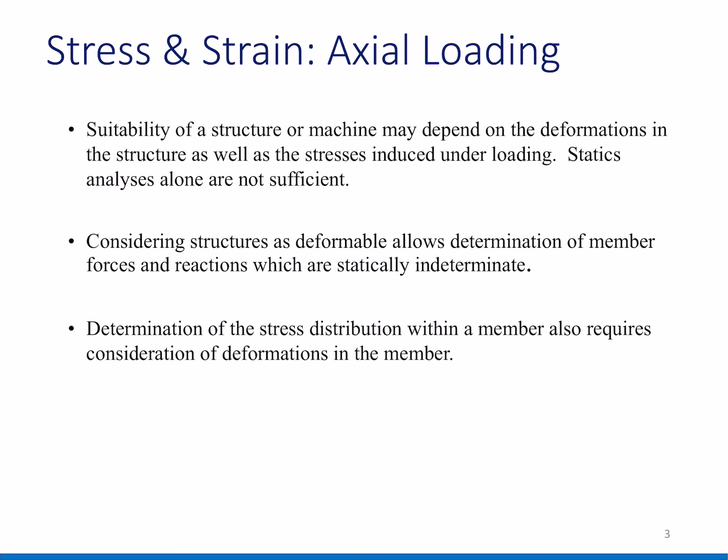So you will see that in each stress distribution formula or problem, we will see that each member of the structure also deforms.

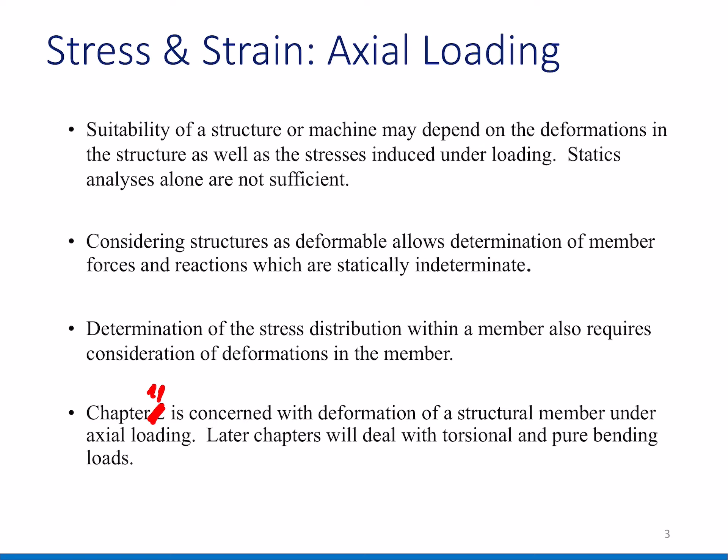This chapter, chapter 11, is concerned with the deformation of the structure member under axial loading. Later chapters will deal with torsion and pure bending. In this case we will talk only about axial loadings.

Normal strain. So this one we will explain about the strain, what is it.

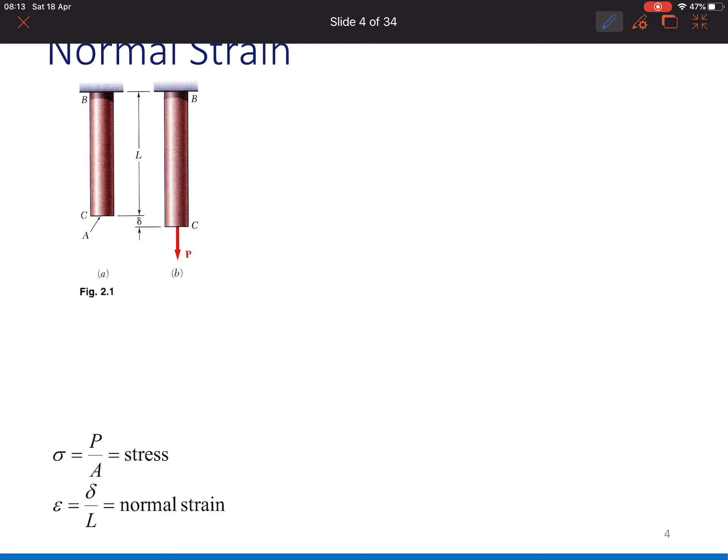If we have this rod which is fixed on this ground, this is picture A, this is the original. This one is a deformable object, meaning when we put force P, we will have these deformations.

If it's SI units, it will be in meters. In the original state, it has a length L. But then in picture B, the length is not L anymore because of course we have lengthened it, so we have L plus the deformation.

The formula below shows the stress and the strain. This is what we call strain, epsilon, and then we have the deformation here. The strain is the deformation divided by the original length, so the strain itself is really the ratio of the deformation to the original length.

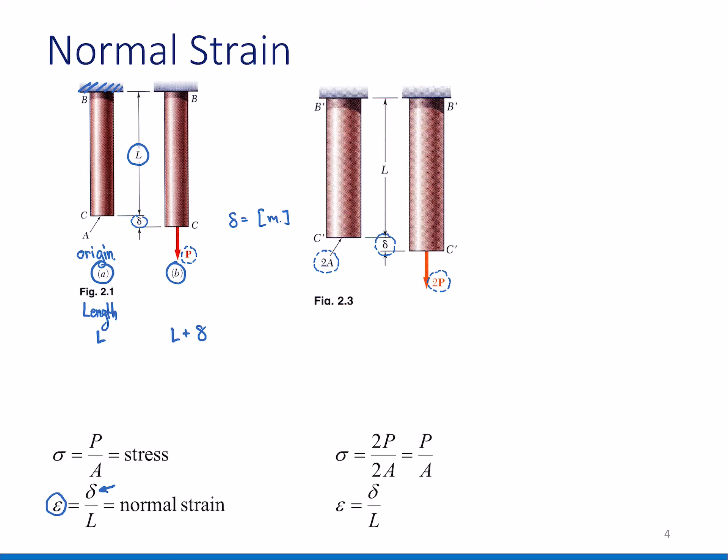So what happens if we have double the area and double the force P? We will still get the same deformation.

What if we have double length 2L, but the same area here, and the same force P? We will have double deformation.

So this means the deformation of the object also depends on the length of the object. If everything else is the same, force the same, area the same, but we have double the length, we will have double the deformation. But as you can see, the strain is still the same, because the strain is just the ratio between the deformation and the original length.

So, what is the deformation then? When you apply the force P here, as I explained in the last chapter, if you cut anywhere on the object, you still see force P applied on it. So every point you cut the object, you have force P.

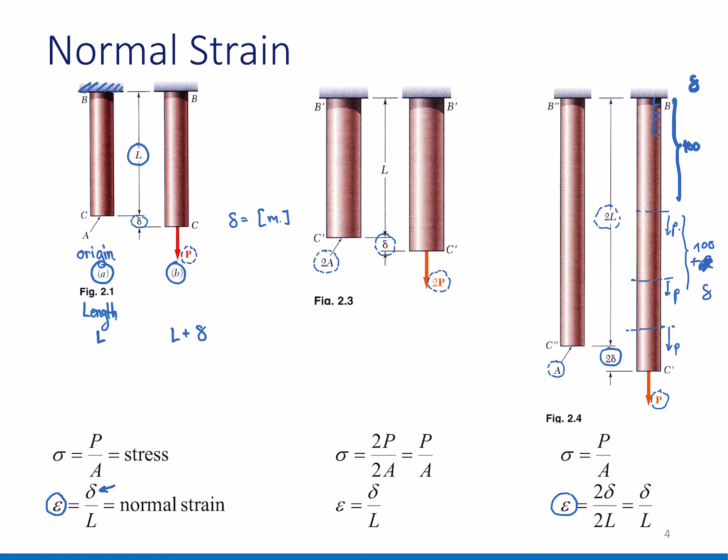Then what does it mean? When I cut this kind of rod into small pieces, and these pieces, for example, if the length L has 100 pieces, each piece is deforming by this deformation length. And if I double the length, I have another 100 pieces here, and then I also have additional deformation to this object. That is why when we have double the length, we always have double the deformation.

Okay, so next is the stress strain test. As I mentioned before, last time we learned about the strength of the material. This time I will tell you where the strength comes from. Actually, it's coming from this kind of test. Of course, there are a variety of tests, but this is the standardized one.

So we have a material here as a rod, and then we fix those two ends. For example, I have a kind of steel, and this is what we call steel. And then someone asks me, hey, can you analyze the stress strain curve or the material strength of this steel?

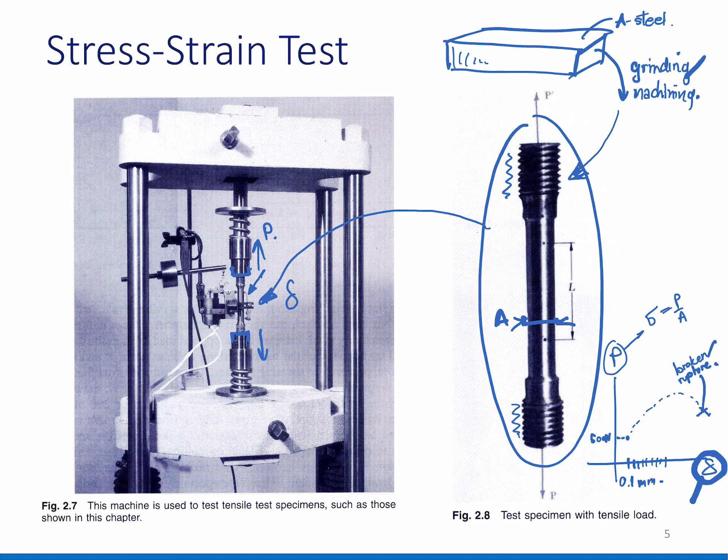What about these deformations? How do we change it? Normally we will not read it as deformation in millimeters, but we will use strain. What is the formula for strain? It's deformation divided by L, right? So we just divide it by the length L here, and then we get the strain.

But actually it's a little bit more complicated, because we also have this length, we have 1, 2, and 3. The formula is a little bit more complicated for the strain, but out of this we can create the stress strain curve.

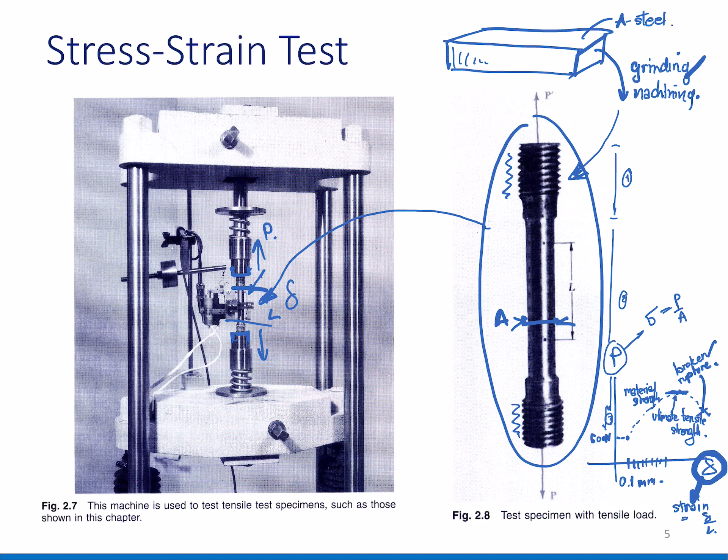And then you know, at this max point here, where the force is highest, we call this the material strength, or we call it the ultimate tensile strength, at this point.

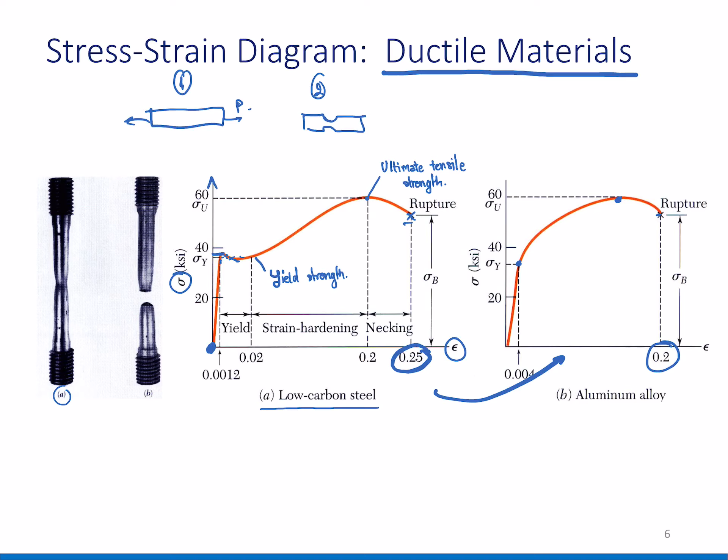Okay, and then we have brittle materials. You can see how sharp this breaking is, quite sharp comparing to the previous picture, right? You can see the previous picture has some shape, necking like this, until it breaks. So here is the picture as B, as the ruptures here, as a circle.

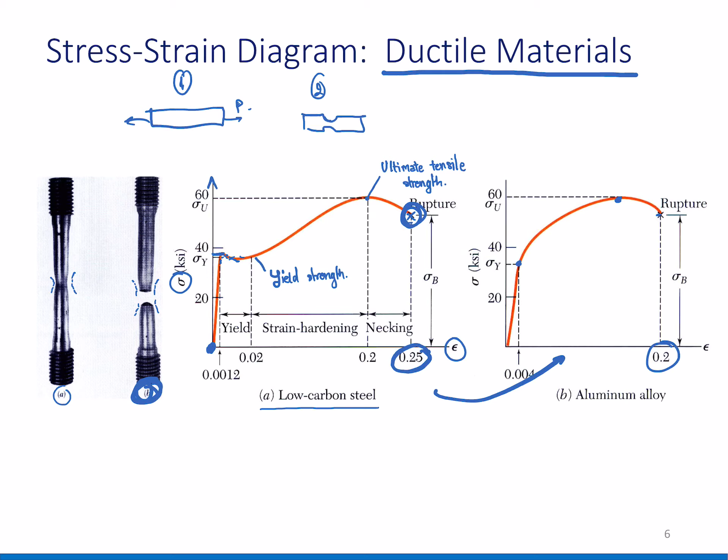So this ductile material is quite deformable. It deforms really high, up to 20%, 25%. But you can see brittle materials here, at this point it's quite small comparing to 20%. I doubt it deforms until 1%. So you can see the sharpness of the break, the position is quite sharp.

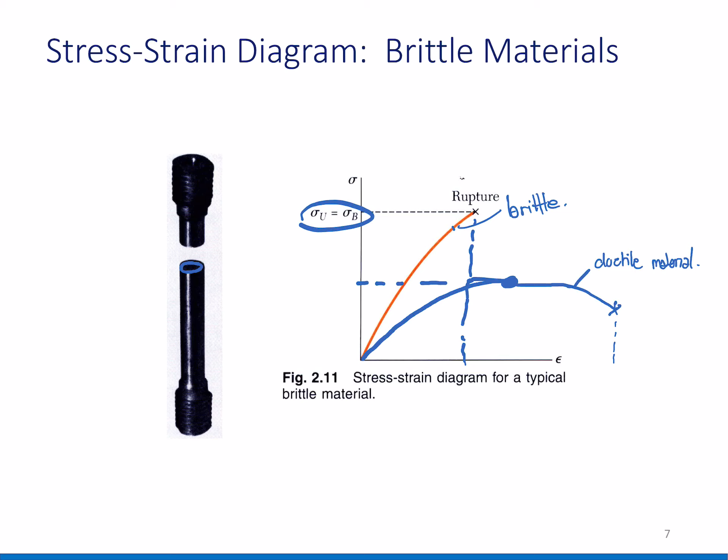But on the other hand, if we plot the previous plot and this plot, I'll just show you a little bit. So this is what we call ductile material. This is brittle. Brittle is like glass, for example, but this is actually not glass. It's not deformed that much, but it has higher strength, normally higher strength until it breaks. You can see ductile materials, the material strength is around here, quite small comparing to the upper one, but it can deform quite large. Compared to brittle materials, the deformation is not that high, but they have higher ultimate tensile strength.

Okay, so then just now comparing, here is what we call Hooke's law, what we are learning so far: here the stress and strain, and here Hooke's law, modulus of elasticity. What is the elastic zone? The elastic zone is this zone, because, for example, if I draw this graph...

And when I deform this one until, for example, if this is point U, this is where I'm stressing these materials, and then when I remove the force, for example, it will go back to the original state because it's still in the elastic zone. Here is the elastic zone. Elastic means when it deforms, it will shrink back to the original state.

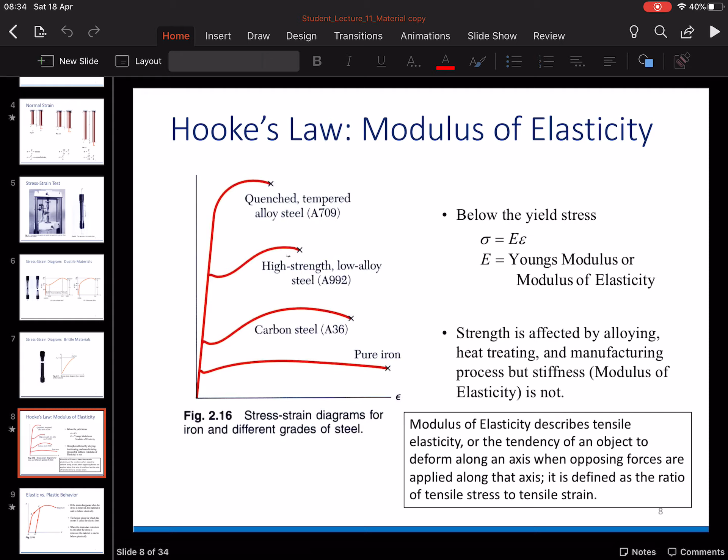What is this one? Oops. Oh, what happens? No. Okay, so when we have quenching here, what is quench? It means we have heat treatment.

To make an example, have you ever seen, maybe in the movies, some Japanese movies, when they make a sword? When they make a sword like this, Japanese sword, for example, a little bit ugly here. But when they're forging it, you know, they have to make the material super hot, right? They make the material super hot, and then the material becomes red. Red means the material is quite hot, and then after that they just put this hot sword into cool water, to lower the temperature quite fast. This is in today's words called quenching.

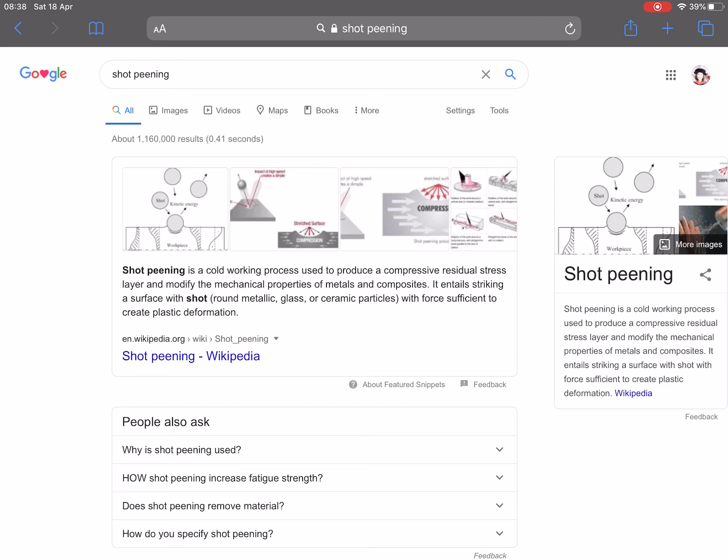Here is another method to have higher strength on the materials. Let's see. Shot peening is, for example, when I have this material, I will use really small balls to shoot onto the material itself, and make the material deform like in this middle picture. So when you have deformation on the surface of the materials, it increases the strength of the material itself. This is what we call shot peening.

So we have materials, then we shoot thousands and tens of thousands of balls into the materials. For example, let me draw pictures. We have a material like this. We have a gun, some kind of gun, and we shoot really small balls at these materials and deform the surface of the material like this.

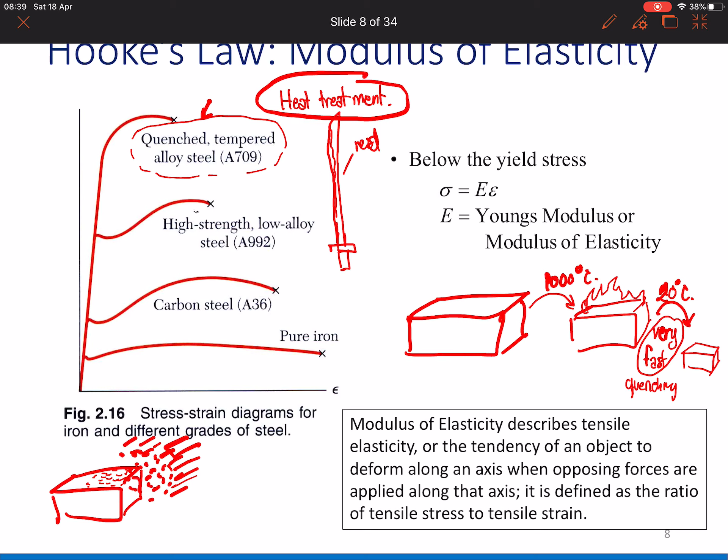This kind of deformation causes residual stress. You may also search this later, I will explain it. The residual stress is just the stress remaining in the materials caused by the plastic deformation. This residual stress helps the material to have higher strength.

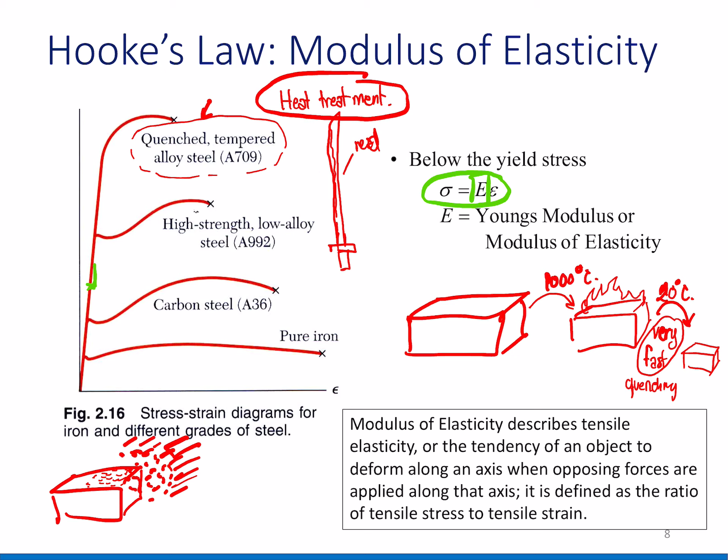All right, going back to our original thing, we have this. Remember again, this is Hooke's law, modulus of elasticity, and this is Young's modulus, and this is the slope here, the slope of this material when they are still in the elastic zone.

As I mentioned, we have this elastic zone, and this is the plastic zone. If the strain disappears when the stress is removed, the material is said to behave elastically, and the largest stress for which this occurs is called the elastic limit, meaning the stress that starts to cause plastic deformation, we call it the elastic limit.

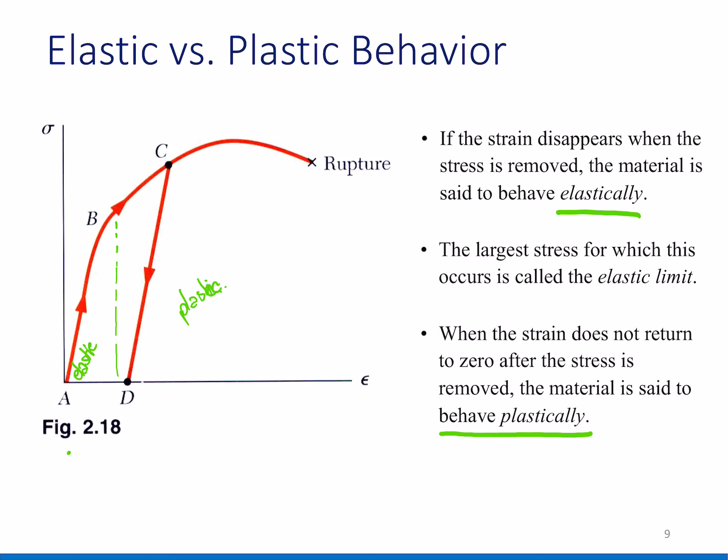When the strain does not return to zero after the stress is removed, the material is said to behave plastically. This is what I explained in the previous page.

And fatigue, this is really important in real life, because this is the most important topic for strength in the automotive industry. What is fatigue? The fatigue is when a member fails by many cycles of loading. For example...

Do you have a can? This is just the thing that you pull out, right? Then you can bend it a couple of times and it will come loose. So it will not break the first time, but it needs cyclic load applied onto the materials until it breaks. And this is all the same for fatigue; it means the material is not broken by only one force application.

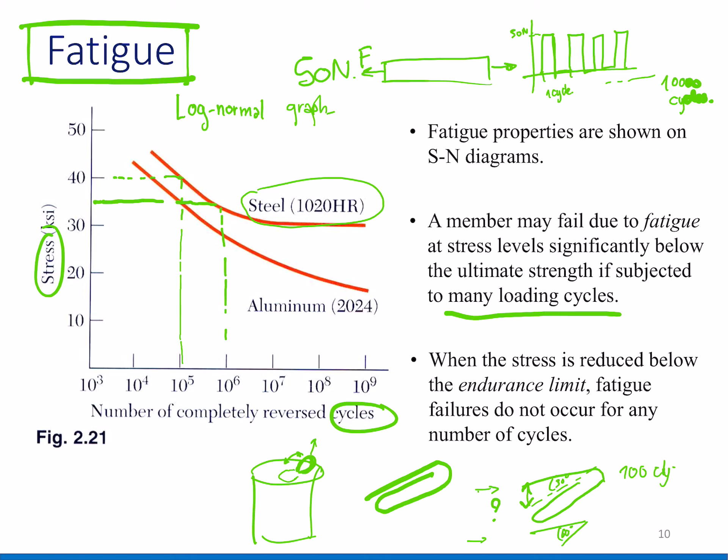Then you take another clip and do it again, but this time at 60 degrees. You will see a big difference in cycles, I promise you. It will not just be 2 times the cycles. For example, if you break the first one in 100 cycles, this one will not be 50 even though the angle is 2 times higher—the cycle count is not just 2 times lower, it will be much less, maybe 20 or 25.

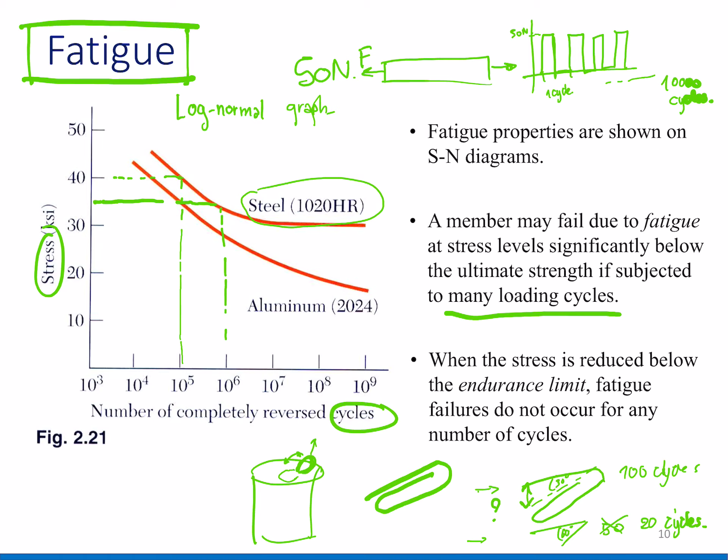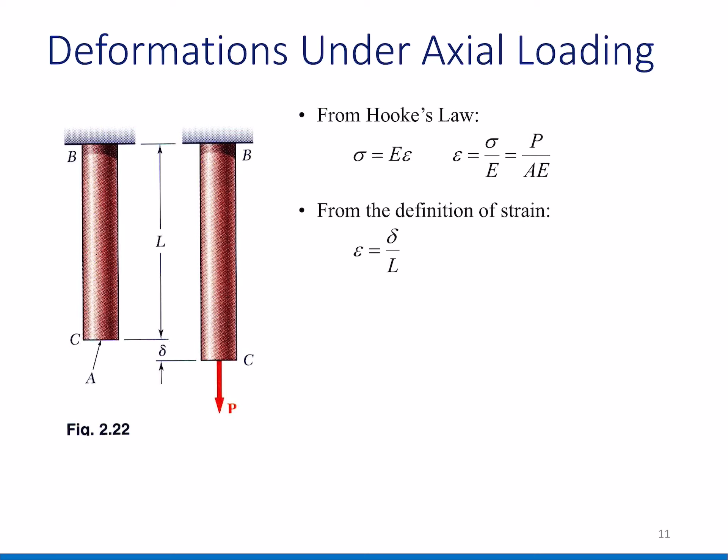Just try it if you want to. Then you learn about fatigue. Fatigue cannot be plotted on a normal graph—it has to be plotted on log-normal.

So, deformation under the axial load. When we have this, we have Hooke's law. Remember this, and Hooke's law can also be transformed into this kind of formula. It's deformation, and this deformation depends on force, area, and the Young's modulus.

Let's see. This strain—not deformation—is the deformation over L. So in the end you can also get the deformation by this formula, but with variation of loading, cross section, and material properties, you can also use this formula.

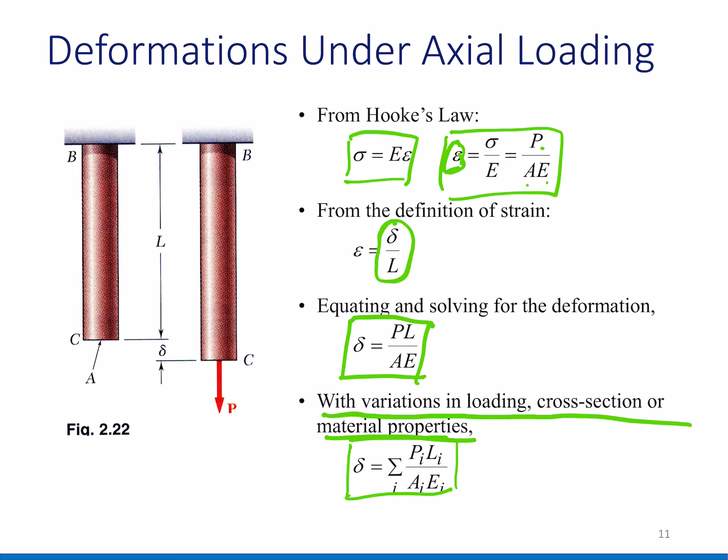For example, if you have different areas and different forces at each point of the body, then you have to use sigma P L over area and Young's modulus. I will show you in this example.

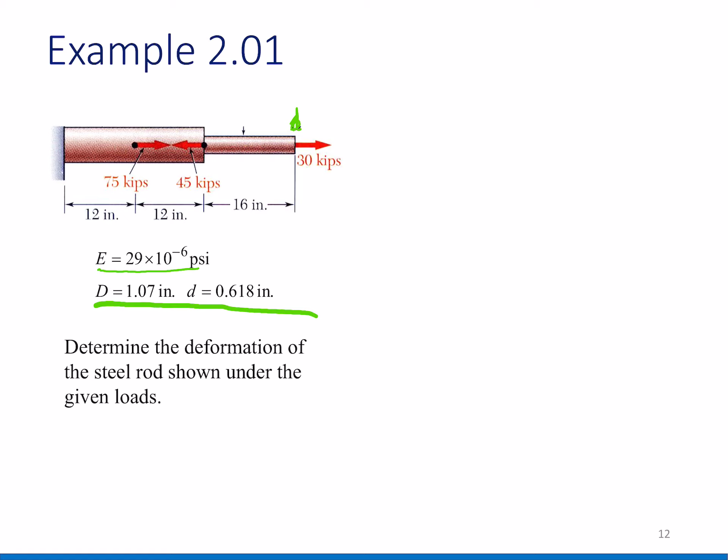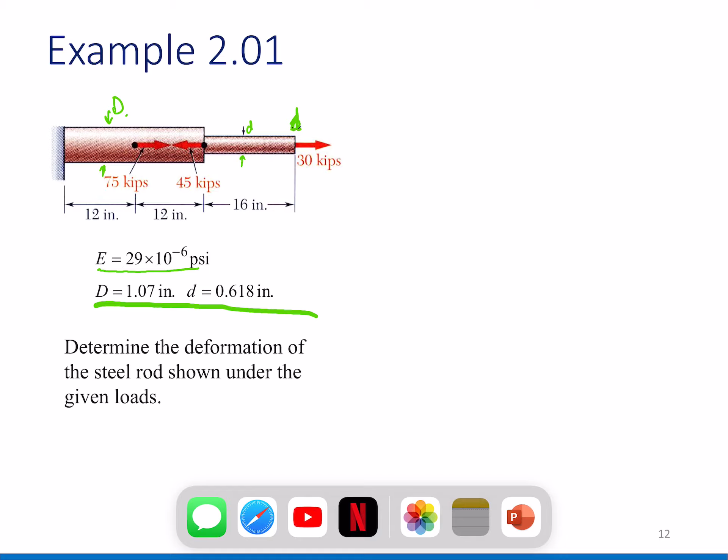So next, determine the deformation of the steel rod shown under the given loads. We are given the Young's modulus, and also the diameters—the big diameter here, and this one is the small diameter, and this one is the big diameter.

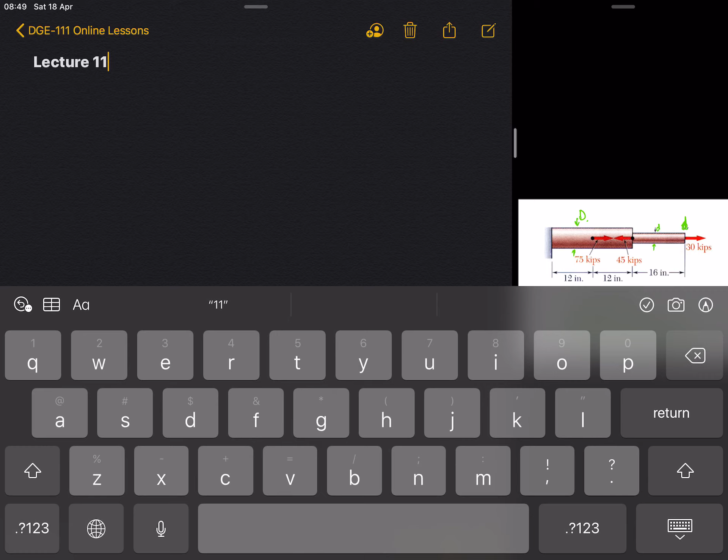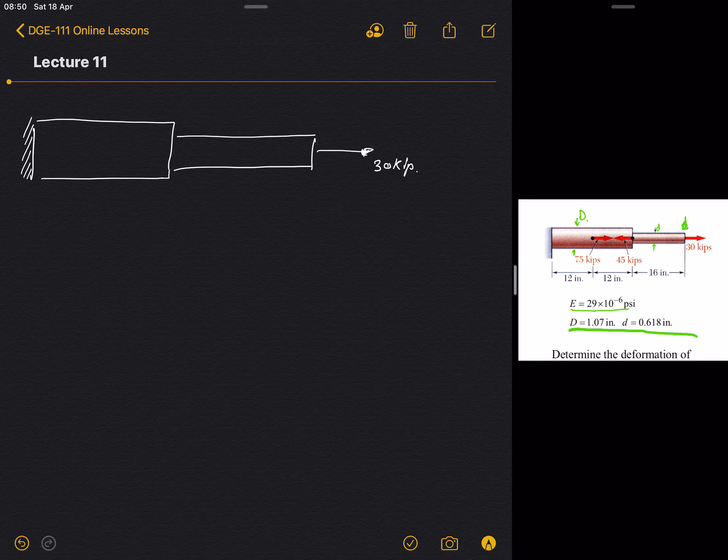So let's start. In this case, first you have to know that we have 3 sections. Write this: we have 3 sections. We have this section, this section, and these sections.

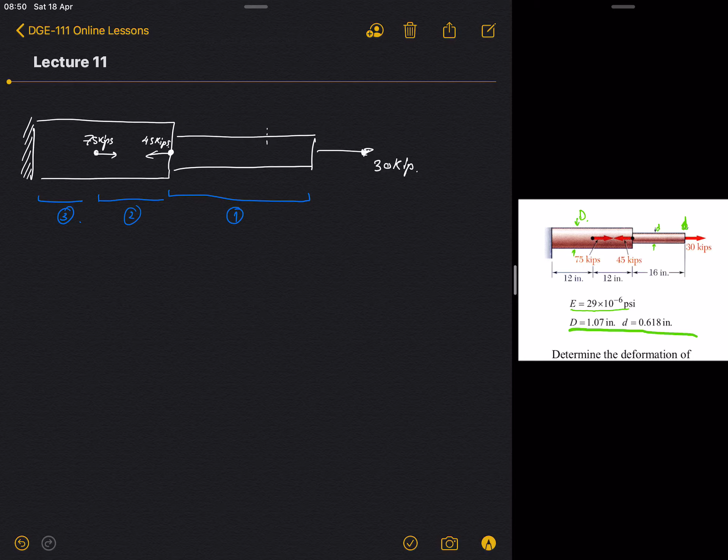Okay, then we will solve this problem together. We start with the first section. When we cut through the first section here—why do we cut? So that we can write the force that is applying to this rod. So we have 30 kips, and this is P1. We know that P1 is equal to 30 times 10^3 lb.

Next is section 2. If we cut through section 2, we know we have this kind of force, and also this force and this force, 30. This is 45, and then P2 is just 45 minus 30, but in this case it will be negative because it's on the negative side. It will be negative 15.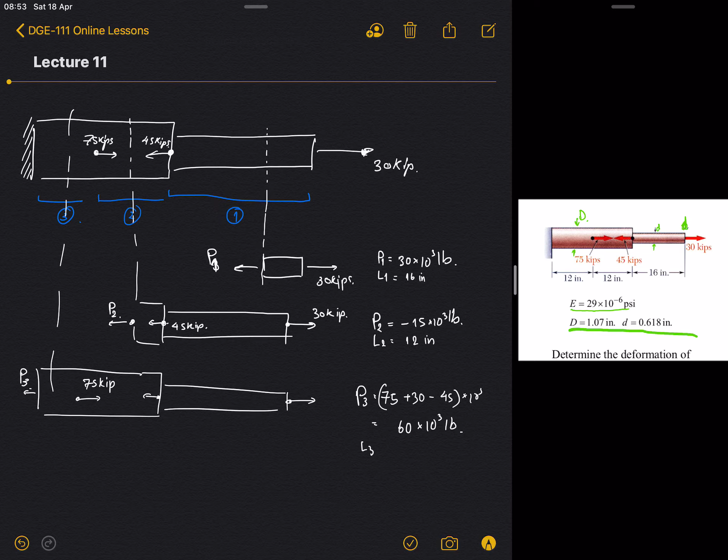Okay, now you know each and every point along those lengths. What is the length for 1 here? Length 1 in the picture is 16 inches. Length 2 is equal to 12 inches. Length 3 is equal to 12 inches.

And area 1 is equal to pi times the small diameter, 0.618, divided by 4, equal to 0.3 inch squared. Area 2, same principle, is equal to 0.9 inch squared, and area 3 is also equal to 0.9 inch squared.

Then in this case we would like to find the deformation, right? Our deformation formula is sigma P L over A and E. You can see that for P we know already for all the points, for L we know already, for area A we also have it on the right side, and for the Young's modulus we also have this. So we can already finish this problem.

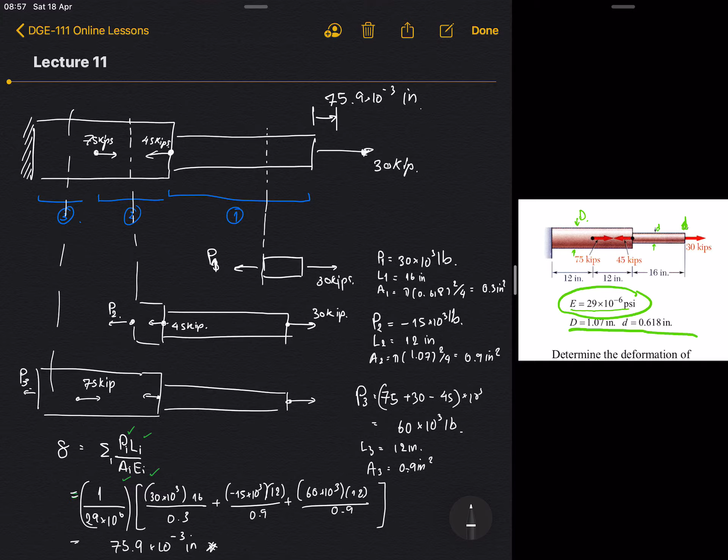So this means this rod will deform by 75.9 times 10 to the power of minus 3 inches. Okay, let's continue next time.